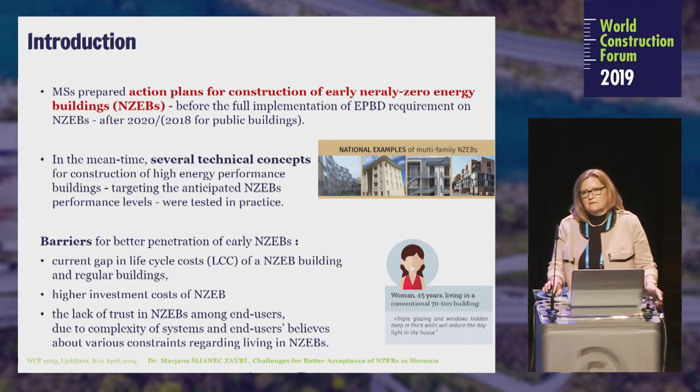To investigate those barriers, we are cooperating in the H2020 project CoNZEBs, which is about reduction of cost of nearly zero energy buildings and removing the barriers for better penetration of such buildings. We are addressing different cost reduction opportunities, and we are also investigating the attitude of end users, either tenants or owners in NZEB multifamily buildings.

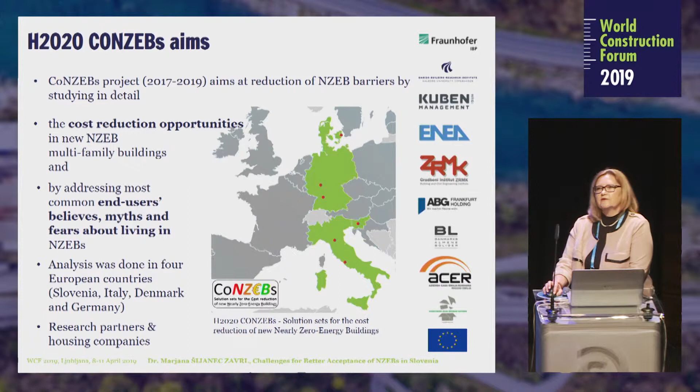In the project, there are 4 participating countries: Denmark, Germany, Italy, and Slovenia. And what is also interesting is the cooperation between research partners and housing associations, housing companies that have a lot of experience out of construction of multifamily housing in the last years.

About NZEB technical definition. Technical definition is a country-specific issue. We know, according to EPBD, that a nearly zero energy building must have low energy demand, and that we must guarantee that this energy demand is covered prevailingly by renewable energy sources on site or nearby the construction site. But in reality, how does this look in participating countries, how do those minimum requirements look?

In Denmark, for instance, multifamily buildings are all equipped with mechanical ventilation with heat recovery, and they also require very low primary energy for covering all energy demand. But at the moment, they claim that the renewable energy supply in those houses will be subject to cost effectiveness. It means that if it pays off, they use renewables. If it doesn't, they follow other sources.

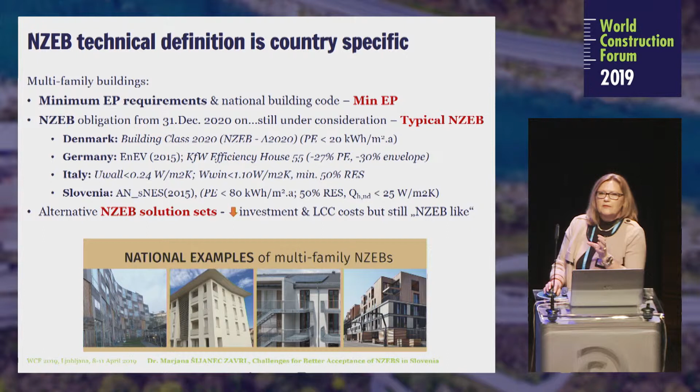In our research, we had the following research questions. Which strategies at design and at construction process can reduce the cost of multifamily nearly zero energy buildings? So let me briefly explain what kind of solutions we investigated. For instance, constructing such houses out of large autoclaved concrete blocks. In Italy, they reported they reached 48% time saving for construction of external walls. And when they used monoblock windows, they saved 20% on costs and 60% on time of construction.

In Denmark, they tested the construction of such houses with roof-integrated photovoltaic panels instead of a classic roof with PV panels added on top of that. 28% cost savings were reached.

In Germany, they searched for architectural solutions. They concluded that constructing social housing with external staircases is much cheaper. And for instance, to go for a very compact surface to volume ratio also reduces the energy cost and reduces the investment cost. For instance, if we reduce the surface to volume value by 0.1, then they reported 20% energy saving and cost savings between 40 to 80 euro per square meter of

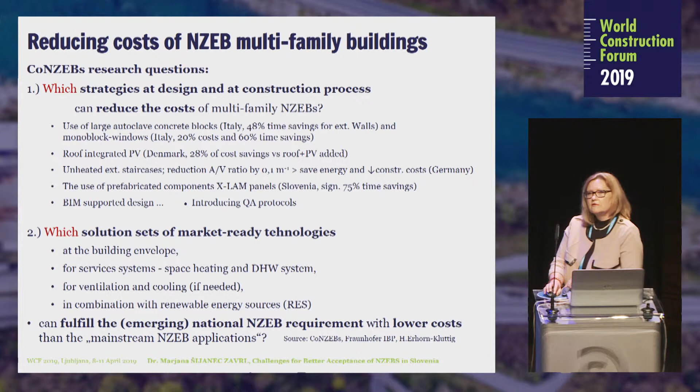There are big expectations of BIM-supported design and of introducing quality assurance protocols in construction of nearly zero energy buildings. The second part is which solution sets of market-ready technologies can fulfill the emerging national nearly zero energy building requirements, of course with lower costs compared to mainstream NZEB applications. So which technologies can reduce costs? Technologies on building envelope, service systems, ventilation, and technologies in combination with renewable energy sources.

So what we did is we prepared a number of alternative energy concepts for multifamily buildings. If we start with minimum energy performance as a building supplied with district heating, double glazed windows, and ventilated with balanced ventilation driven by humidity in the living space, then we developed those energy concepts towards heat pumps, towards combination with PV panels, triple glazing, better air tightness, and of course heat recovery in ventilation.

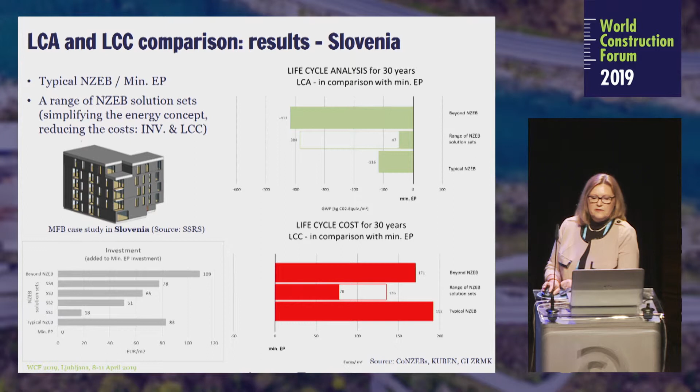What about the life cycle costs? We concluded that typical NZEB buildings are much more expensive than minimum energy performance buildings. But our alternative solutions are cheaper. So actually we can find cheaper solutions than the ones that were most frequently used in the last maybe 4 to 5 years. About life cycle analysis and life cycle impact, we can conclude that the global warming potential in the alternative solution is better compared to the standard solution and better compared to nearly zero energy buildings.

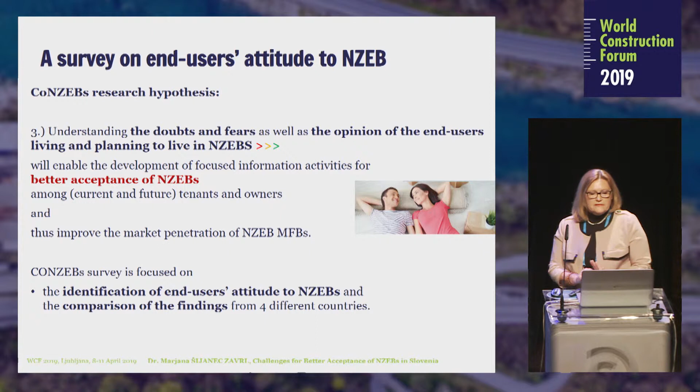And the third problem I try to present to you is the attitude of end users. By understanding the doubts and fears and the opinion of end users about living and planning to live in nearly zero energy buildings, we can design information campaigns for better acceptance of nearly zero energy buildings.

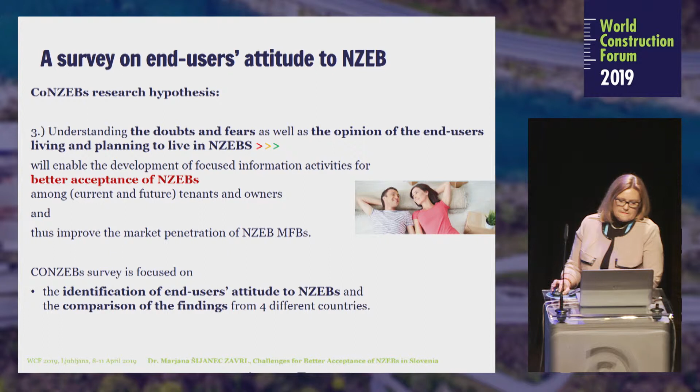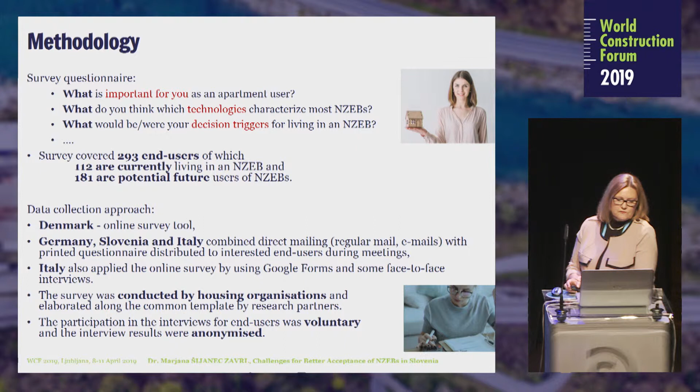How did we approach this issue? We prepared a questionnaire which focuses on questions like what is important for you as an apartment user, which technologies do you think characterize nearly zero energy buildings most, what would be or what were your decision triggers for living or moving into NZEB buildings. Altogether, we collected almost 300 responses from end users from 4 countries. And here are some interesting results.

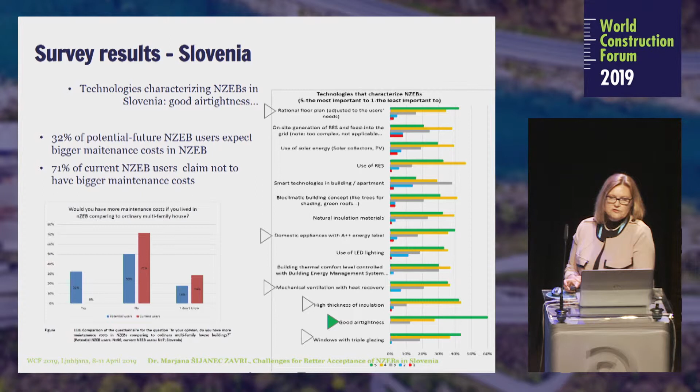For instance, for Slovenia, the question which technologies characterize nearly zero energy buildings most. In Slovenia, end users think that the most important and most relevant for having an NZEB is to have good air tightness, then triple glazing, high thickness of insulation, mechanical ventilation with heat recovery, good appliances, A++, and also a good architectural concept. And after that come renewables and energy efficient systems.

One more interesting fact is that 32% of potential future NZEB users expect bigger maintenance costs in such buildings. But in reality, 71% of current NZEB users claim that they actually don't experience bigger costs.

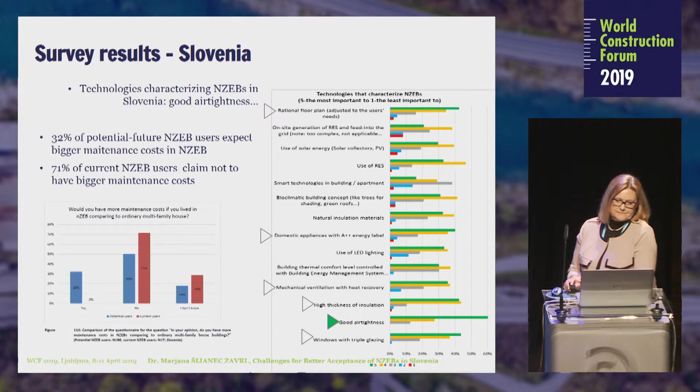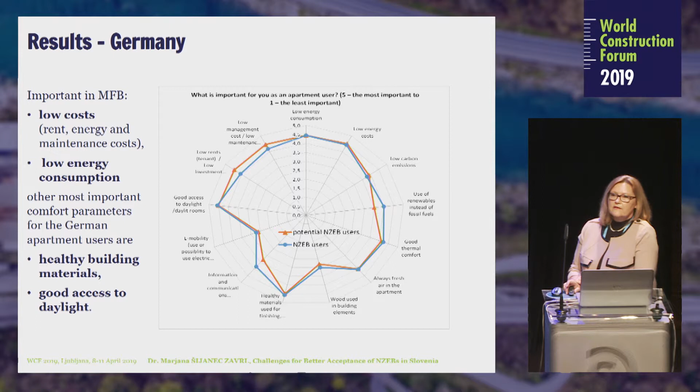Results for Germany, for instance. What is important for German multifamily building users? Mostly they are tenants in such buildings. So they think that low costs for rent, energy, and maintenance are important, low energy consumption, and also healthy building materials and good access to daylight.

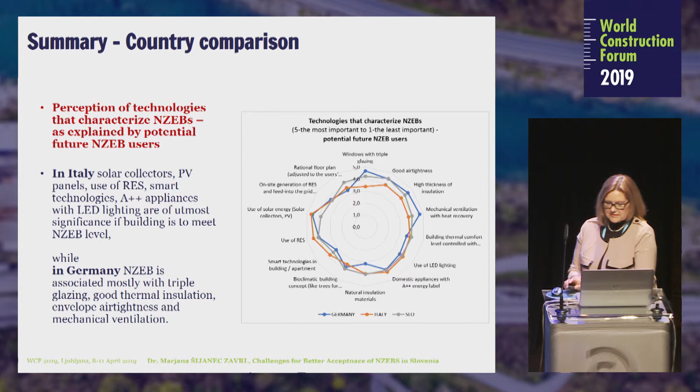If we compare between the countries, then we can say that the perception of technologies that characterize nearly zero energy buildings, as explained by potential future users of nearly zero energy buildings, is like that. In Italy, the most characterizing technologies are considered to be solar collectors, photovoltaic panels, renewables, smart technologies, A++ appliances, LED lighting, while in Germany, nearly zero energy buildings are associated with triple glazing, good insulation, envelope, airtightness, and mechanical ventilation.

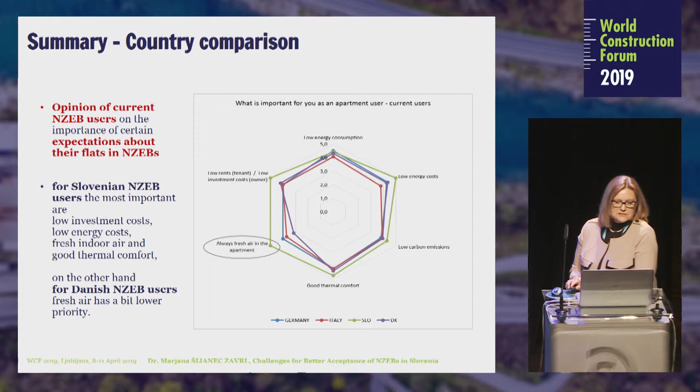Another issue: opinion of current nearly zero energy building users on the importance of certain expectations in their flats. For Slovenian NZEB users, the most important are low investment costs, low energy costs, fresh indoor air, and good thermal comfort. On the other hand, for Danish NZEB users, fresh indoor air has a little bit lower priority, which does not necessarily mean that they don't care about it, but they probably take it for granted because they already use mechanical ventilation with heat recovery.

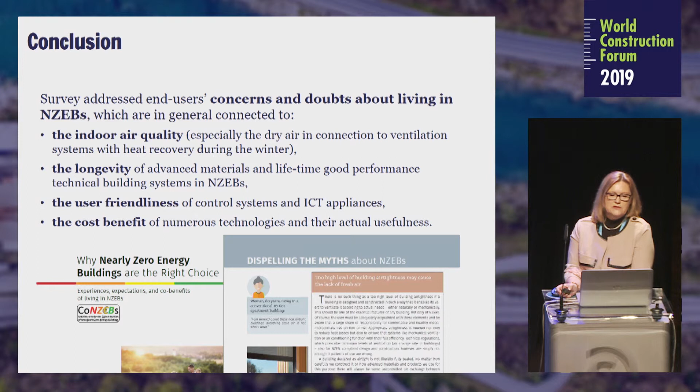To conclude, the survey addressed end users' concerns and doubts about living in NZEB buildings, and those doubts are in general connected to indoor air quality, especially dry air in the winter, and the doubts were related to longevity of advanced materials and lifetime good performance of technical building systems in nearly zero energy buildings, about the user friendliness of control systems and ICT appliances in the building, and about the cost benefit of numerous technologies and their actual usefulness. So this is the opinion of the users.

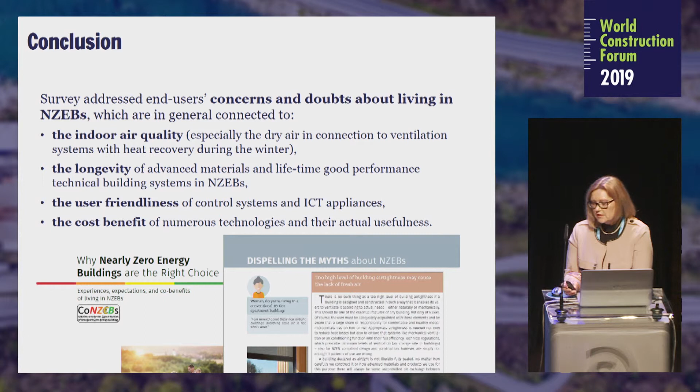The challenges in construction of multifamily nearly zero energy buildings in Slovenia are to reduce NZEB investment costs by alternative solution sets in order to make these buildings more competitive and to facilitate the NZEB market. The challenge is to introduce experienced designers into the process, to engage skilled construction teams, and to introduce quality assurance protocols in the construction process. The challenge is to optimize the costs and environmental impact over the whole life cycle of such buildings, to increase end-user acceptance by sharing tenants' and owners' best practice in living in NZEBs, and by dispelling the myths about living in such buildings.

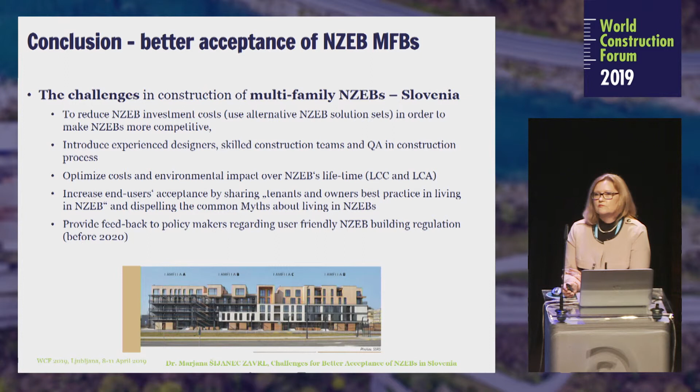And finally, to provide feedback to policymakers regarding user-friendly NZEB building regulation, which is about to be put in place by the end of the year 2020.